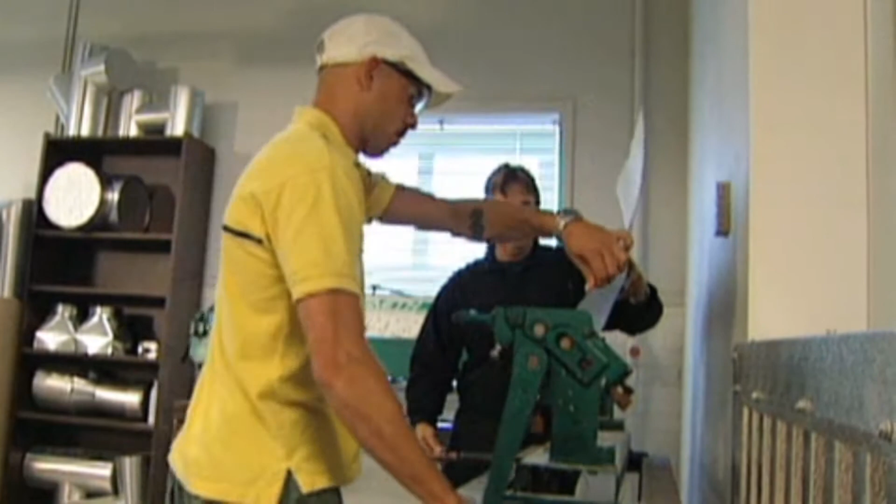Look, we know your time is valuable, but a tour through the video features provided on this site are going to demonstrate a few simple truths to you. Number one, if you don't spend a great deal of time discussing what proper insulation can mean to your refining or manufacturing facility, you're not alone.

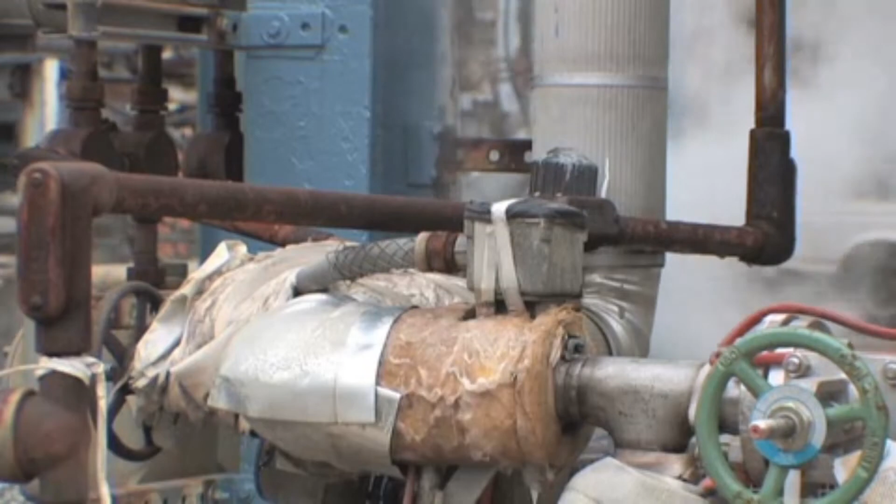When companies plan their annual budgets, they almost always allocate dollars to core assets. Since your facility is likely already up and running, insulation and energy management are really considered non-core assets. However, poor or no insulation at all is costing you thousands and thousands and thousands of dollars each and every day. These are dollars you can never get back.

We're going to show you why it makes operational, financial, and environmental sense to at least address the possibility of better energy efficiency and management through insulation.

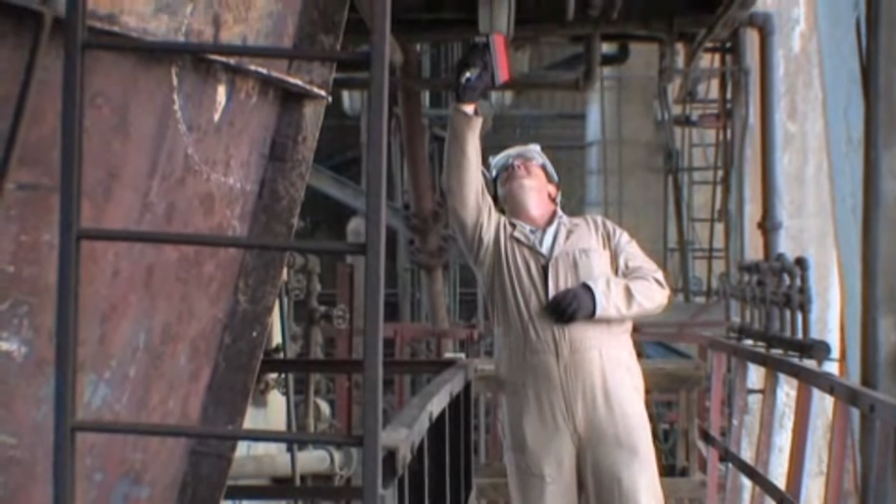Number two, we're going to tell you about a Department of Energy approved evaluation audit and computer program that can tell you how many energy dollars are evaporating into thin air, the type and amount of insulation needed to correct the problem, and how quickly the project will pay for itself.

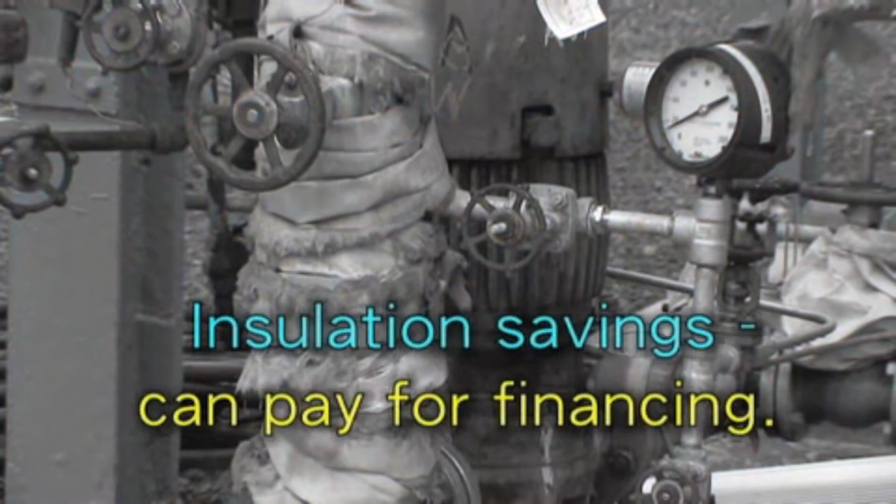Number three, we're going to give you some ideas on how you can begin to fix your insulation problem without even dipping into operating capital if you don't want to.

Number four, we're going to tell you about some forward-thinking companies that are well down the road towards improved energy efficiency and are saving big bucks as a result.

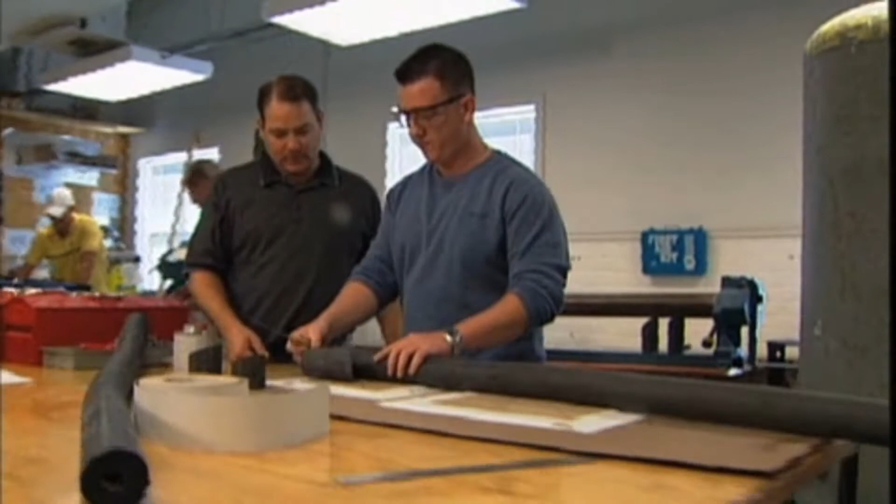And number five, we'll tell you how an insulation project designed and installed by craftsmen and women who are the products of years of formal industry training will maximize every dollar you spend.

Insulation may not be the talk of Wall Street, but investing in it pays you back many times over. When you do it, tell the world. It'll go over great with environmentalists and the green movement. In fact, why not tell your stockholders too? Anything you can do to improve the bottom line with documentable savings and appeal to the green movement sweeping the country just might be sexier news than you think.

In virtually any manufacturing and production situation, heat is the catalyst that turns raw materials into finished products. And since large plants require large amounts of energy to operate, conventional wisdom would tell you that a high priority is placed on insulation to harness as much of that heat as possible.

Wrong. In fact, recent research by an industry leader concluded that 63% of energy projects with a payback of less than 3 years are never initiated. Perhaps that's because historically, when the cost of energy was inexpensive, no one really cared how much energy was lost in the manufacturing or refining process. And when you throw in an 'if it ain't broke, don't fix it' mentality, you can see why things like improving insulation are not high on the budget list.

But when you consider that the utility cost of a plant these days can run 50% or more of its entire operating expense, maybe you should give insulation another, more serious look.

We recently took a walk around an industrial facility to look for random examples of heat loss, losses that drain dollars from company coffers, like a silent bandit. Chris Kahn has the report.

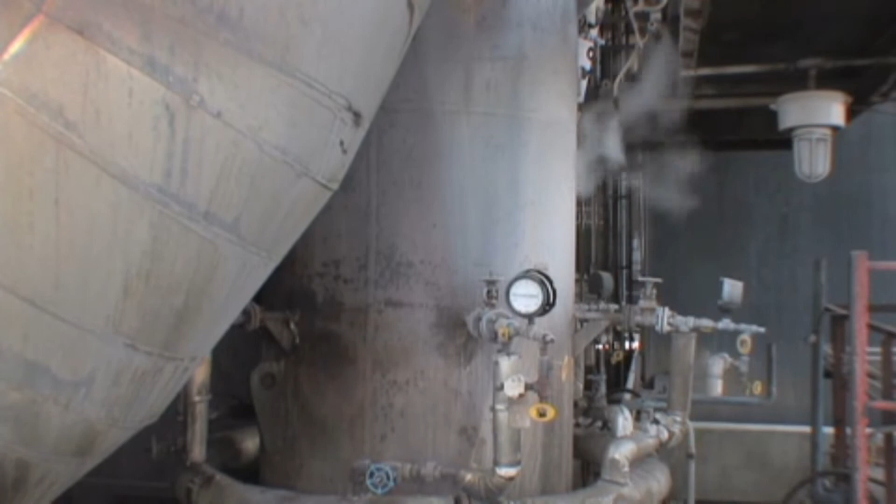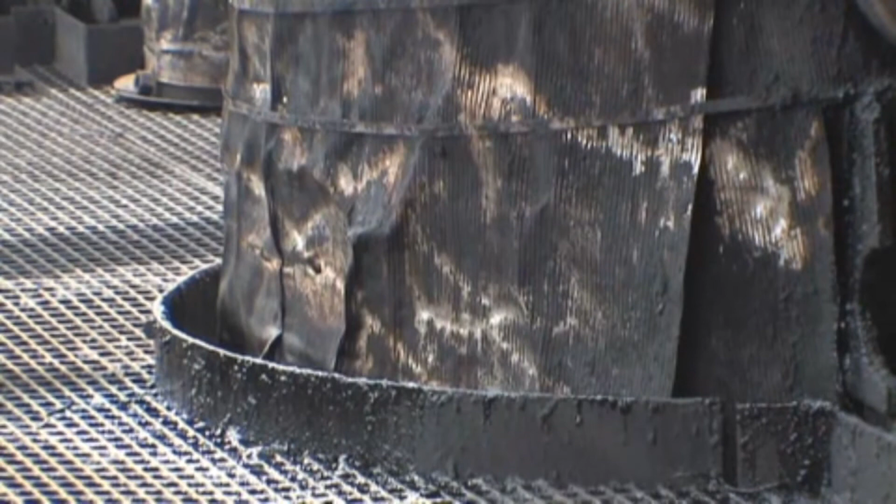This is Keith Wagner, a representative of the iSave team. In his hand is a heat gun. He points the gun, pulls the trigger, and a laser shoots where he's aiming. The gun gives him a reading of how hot this target is. The hotter the target, the more heat, the more money that is escaping into the air. Today, Keith's target is any pipe, drum, or valve inside this refinery. He's comparing or illustrating heat loss by taking readings between pipes with good insulation, poor insulation, or no insulation.

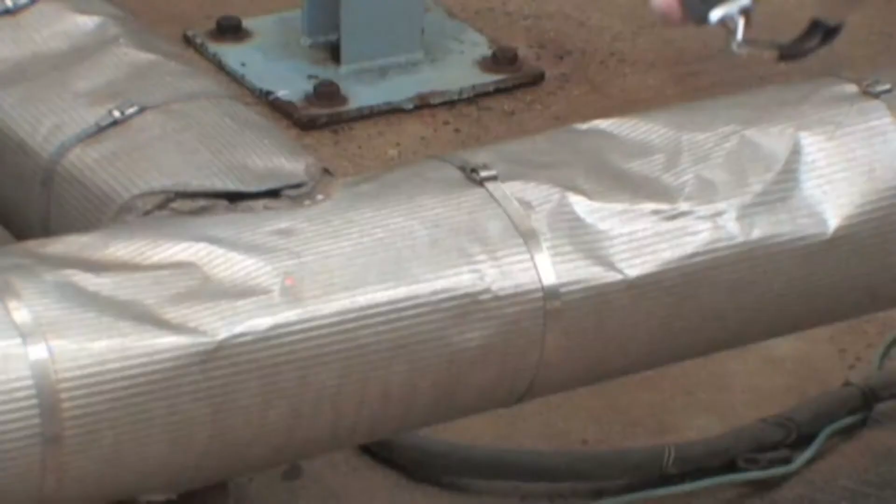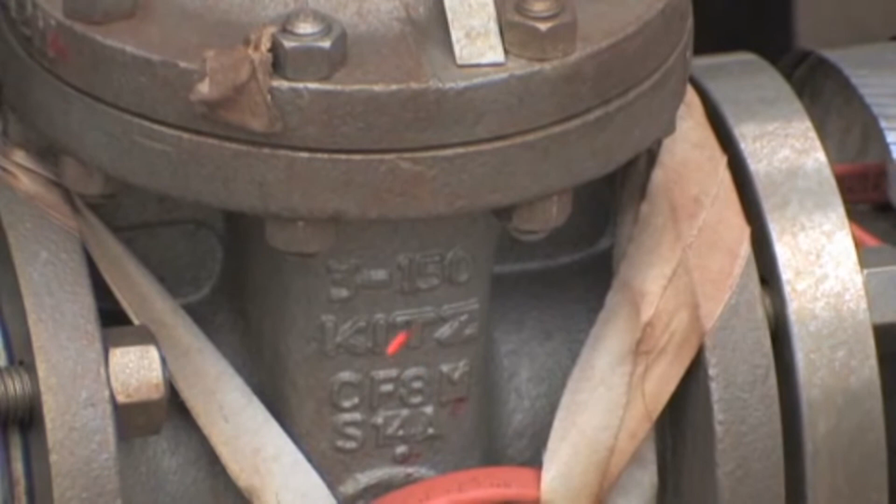When we do the shooting of the poorly insulated piping, even though the piping is insulated, it needs some work. It registers approximately 50 degrees Fahrenheit on the scale. When I move the gun over to the uninsulated valve, it immediately jumps up to 150 degrees, showing a dramatic heat loss. This is something you actually see, you visualize, and with today's rising fuel costs, it's felt in everybody's pocketbook.

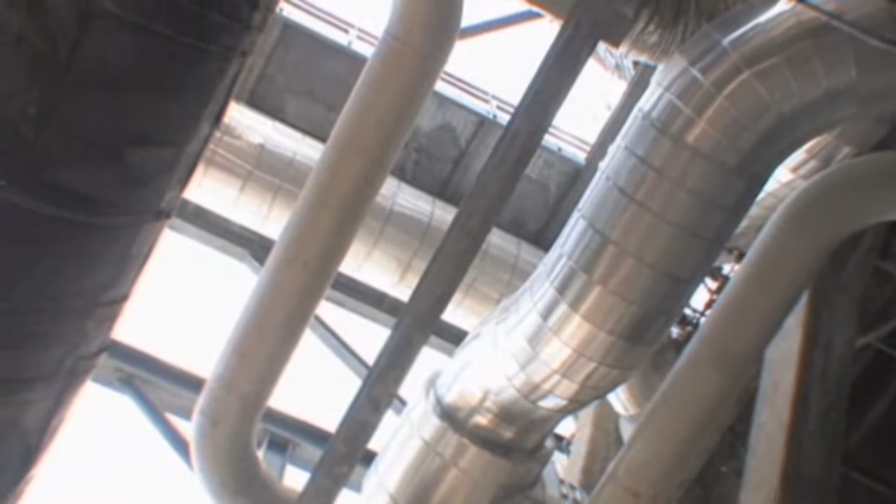The hottest part of that pipe was only 150 degrees. In truth, not that bad, but we're just getting started. The more we got into the plant, the more extreme the temperature variations were.

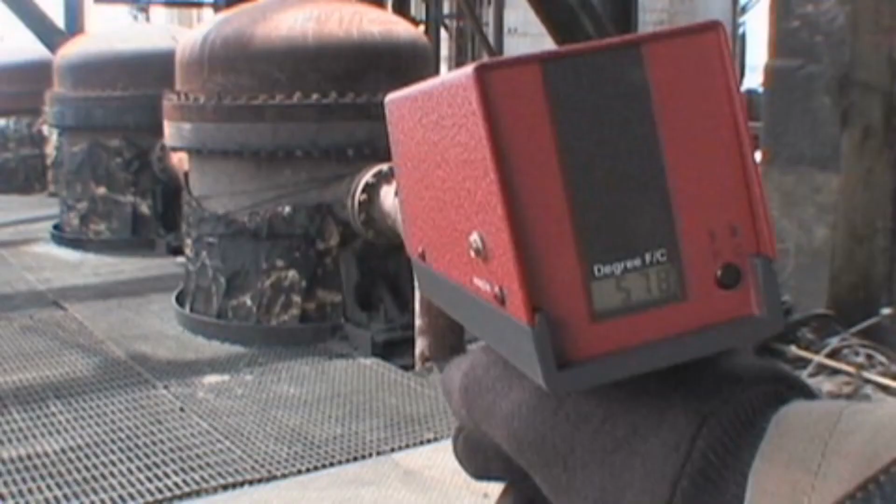Widespread heat loss situations like this prompted consultant engineer Mr. Gordon Hart to do a study that was published in Insulation Outlook magazine. The results would make any CEO or CFO fall right out of their chair.

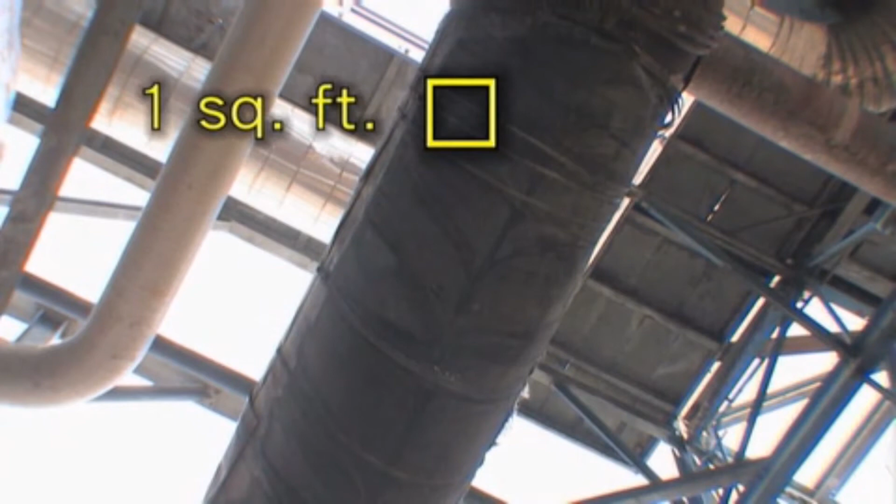Using an educated set of calculations, Hart was able to show that even 1 square foot of 600-degree pipe covered with 4-inch thick insulation would save 16 barrels of oil every 5 years. Using a baseline number like $100 a barrel, that's $1,600 simply gone with only 1 square foot of exposed pipe.

Now, how many square feet of poor or no insulation does the average small plant have? The number is actually in the hundreds of thousands. Now, how many plants are online with one company at any given time? That number is usually through the roof. But whatever your number is, you're definitely not alone.

Because Hart didn't stop there, using his educated set of criteria and calculations, Hart estimated that in 2004 alone, U.S. oil refineries collectively lost an estimated 585,000 barrels per day due to excess energy loss through damaged or missing mechanical insulation. Using Hart's heat loss numbers from 2004 with a rough estimate of today's oil prices, the number is more than $58 million in heat loss.

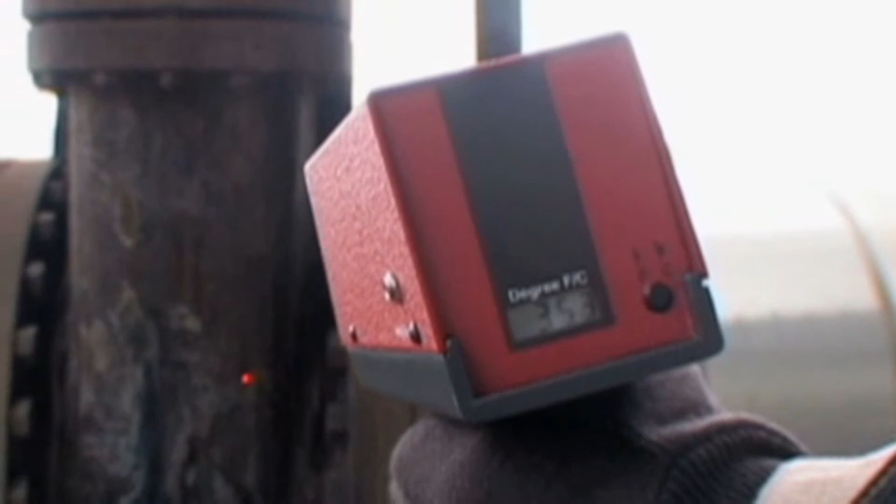So, if you're ever in a position to be near a heat gun that is showing you a pipe that's 350 degrees next to an insulated pipe that's 80, don't think of it as numbers in Fahrenheit. Think of it as your money that is silently slipping out of your reach.

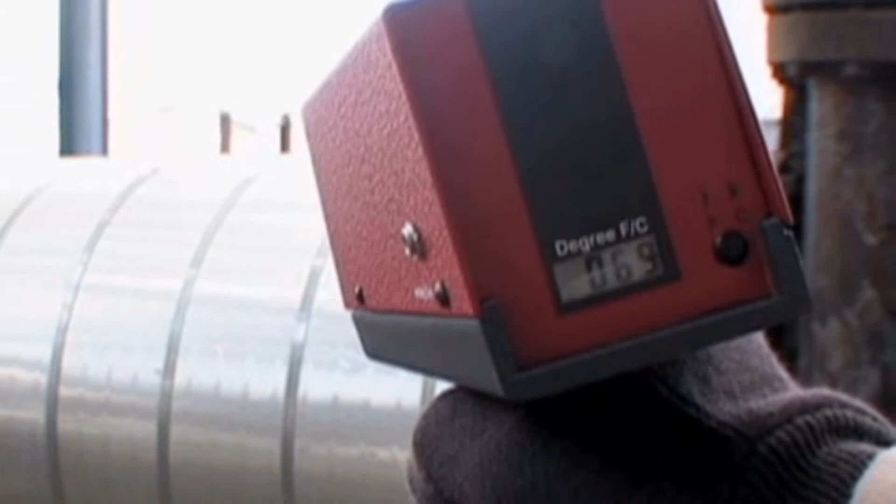If you'd like the details on Hart's study, make sure you pick up a copy of the May 2005 edition of Insulation Outlook magazine. Hoping you don't shoot the messenger, I'm Chris Kahn.

Thanks, Chris. Everyone knows it's not practical to take on a sweeping insulation project, one that covers every pipe and valve at every company's facilities all at once. But many large manufacturers that have begun the process are seeing immediate results, and they're ramping up their insulation upgrades.

One of the tools they're using is the Department of Energy endorsed 3E Plus program. It's a way to take a look at an industrial facility and break out an energy saving plan into real numbers. It lets you see what the insulation costs are and what the savings would be. More on 3E Plus is just a click away.

The North American Insulation Manufacturers Association has developed a software program designed to help you easily determine how much insulation is necessary to use less energy, reduce plant emissions, and improve process efficiency at your plant or facility. There's very little time in a manufacturing facility manager's day to look at the efficiency of the energy delivery system. Conversely, a lot of a facility's costs are directly influenced by the amount of energy used and, more importantly, lost.

The 3E Plus program attacks your energy issues head-on when a certified insulation appraiser spends a couple of days in your plant and develops options on how to improve your energy efficiency. They can give you actual numbers and show you actual dollar savings.

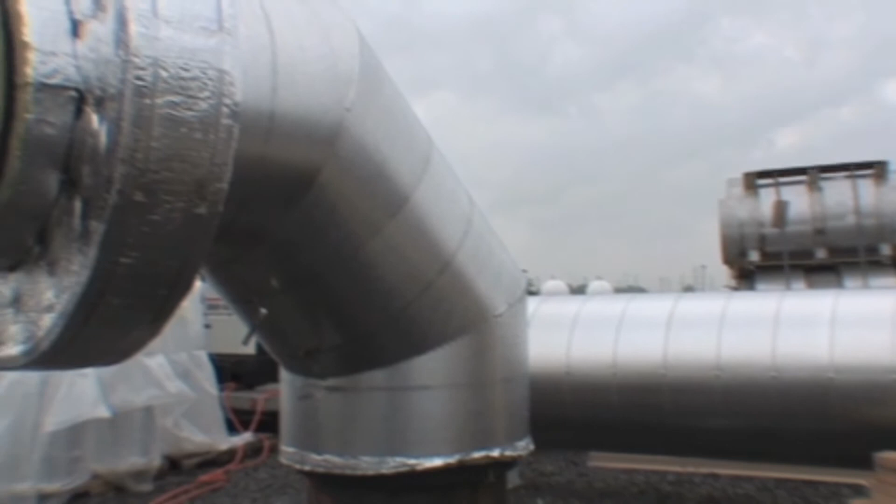The software allows the appraiser to run a handful of different scenarios depending on your plant's energy priorities.

I'm here today to talk about NAIMA's 3E Plus program. 3E Plus is a computer program that will allow you to calculate heat loss and heat gain in a piping or insulation system. It's a simple program.

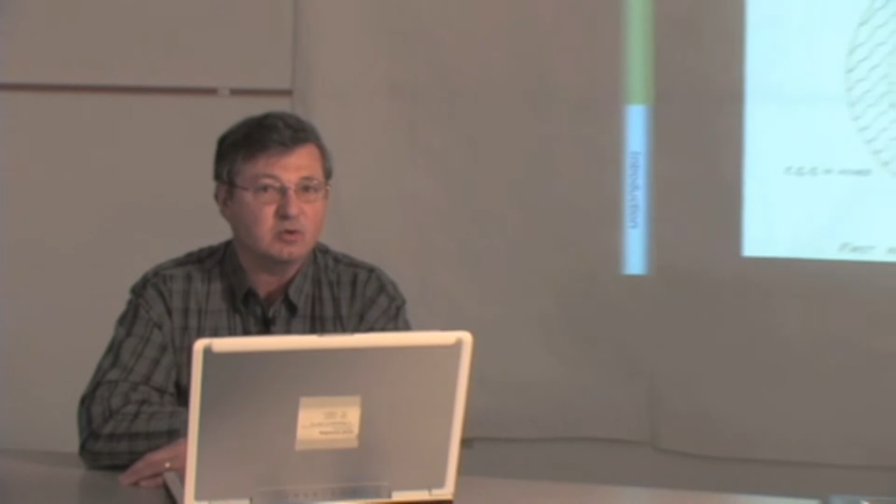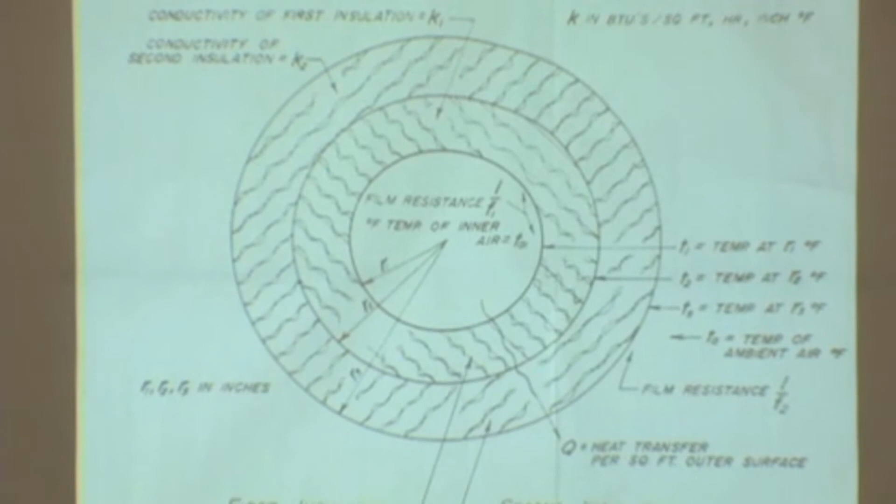It does a steady state, one-dimensional heat loss calculation of a piping or equipment system. For example, we're showing here a pipe which has two layers of insulation on it. It's got an inside temperature with fluids inside, and an outside ambient condition.

3E Plus goes through the calculation of BTU heat loss in this system. Let's assume we're talking about a steam system in a plant, and we're interested in calculating the heat loss per hour. We're going to look at a pipe that might be horizontal. The program allows you to look at horizontal and vertical piping, horizontal and vertical tubing, and a number of different systems.

Let's stick with horizontal pipe for a second. Assuming the process temperature is 350 F, the ambient might be 75. Let's pick a pipe size of 12 inches, and let's assume the wind speed is maybe 3 miles an hour for the particular case we want to look at.

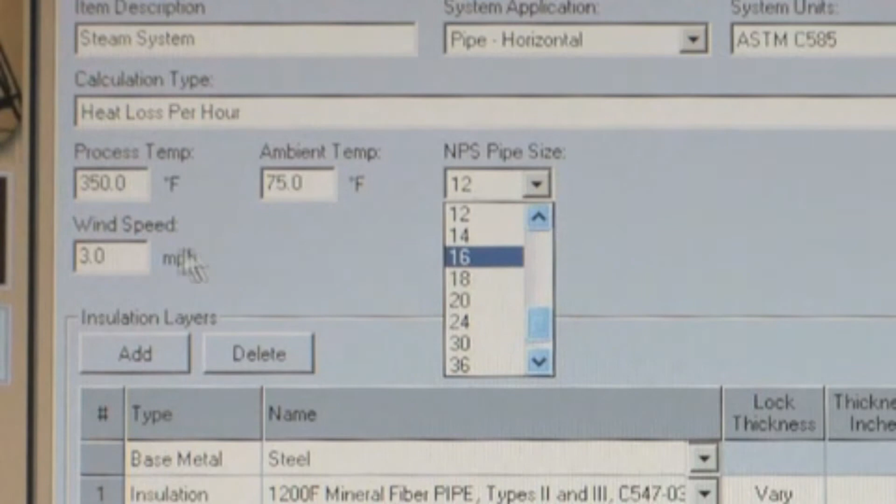The program allows us to select the material system we're interested in. The base metal here is steel, but we could choose stainless steel, copper, PVC, or other materials. The insulation in this case, let's assume 1200 F mineral fiber, and let's assume a jacketing of aluminum with an emittance of 0.1.

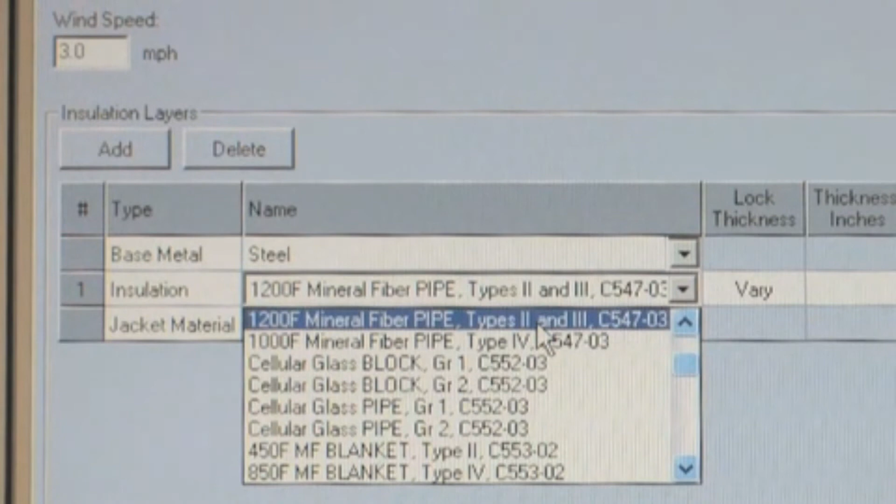Simply hit the calculate button and the program will calculate the heat loss and surface temperature for a bare situation with no insulation, and a number of different thicknesses going from 1/2 inch to 10 inch.

In this case, you can see that for a bare pipe, uninsulated, the surface temperature would be about 349 degrees, not 350 degrees like the fluid inside. The heat loss would be 2939 BTUs per hour per linear foot.

Adding only a 1/2 inch of insulation to that brings that surface temperature down to 150, and reduces the heat loss to 409 per this calculation, which is about 86% less than the bare case.

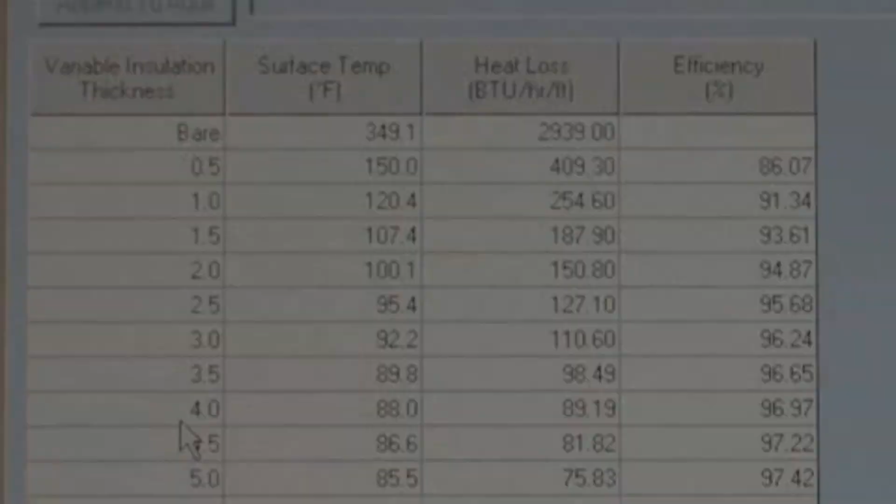Just think of how many pipes, drums, valves, or boilers you have in your facility that are like this. Think of how much money, at more than $100 a barrel, is vanishing into thin air in the form of heat loss. With a little homework and investment of time, you can get an energy audit of your facility, and more importantly, you'll be able to tell in raw, actual numbers just how much money you'll save and how quickly you'll save it.

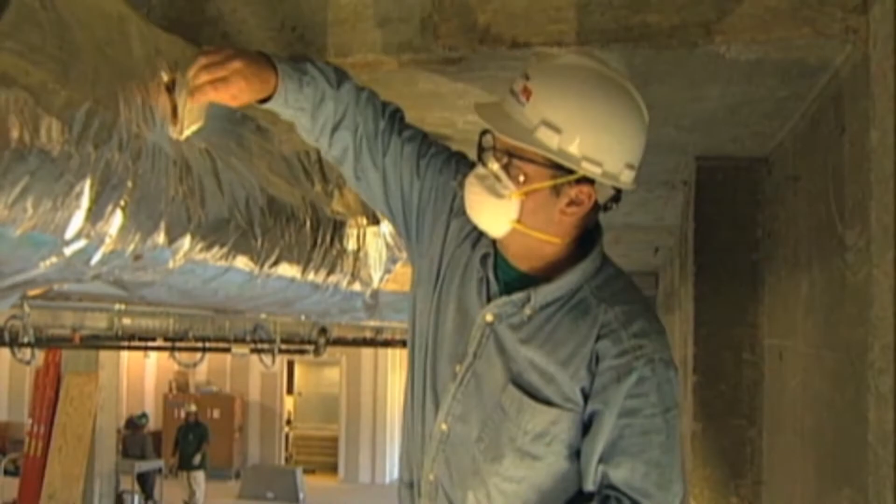With the money at your disposal, you can take on an aggressive, sweeping energy saving plan right away. You can do more, quicker, and fix the cost of your improvement campaign to plan accordingly. With improved insulation, your machinery will perform better and take less toll on the people working around it. You'll begin saving on energy costs right away, and here's the biggie: your energy savings will soon pay for the cost of the insulation upgrade. You'll pay off the note quickly, then benefit from reduced energy costs for years. It's good for your plant, it's good for your workers, it's good for the environment, and it's good for the bottom line.

Thanks, Brian. Cost savings without a big hit in capital expenditures. Upgrading or installing insulation in your facility really can be the best of both worlds. If you've spent any time on this site, you know by now that installing or improving insulation at your facility will save you big money in energy costs. Now it's time to talk about actual case studies, and joining me with the numbers is Brian Joyce.

Thanks a lot, Tom. The insulation industry is one where a person can really do the math and point to actual cost savings as a result of work being done. I have a few examples we can run through, with numbers courtesy of the National Insulation Association and the Department of Energy. Some of these numbers are real eye-openers when you take a look at them, Tom. Well, let's take a look at them.

Let's start with the paper mill down in Jackson, Alabama with Boise Cascade. Just by replacing pipe insulation, they spent $25,000 - that's all they spent. Their savings: $80,000, and that's a payback in less than 4 months, Tom. It's paying for itself in 4 months.

Let's go to Kingsport, Tennessee and check in on Eastman Chemical. They took a best practice approach to insulation, going through their plant and making necessary changes to maximize the impact of their insulation. Get this: $1 million in identified savings with re-insulation cost of only $300,000. That's a rate of return in 4 months.

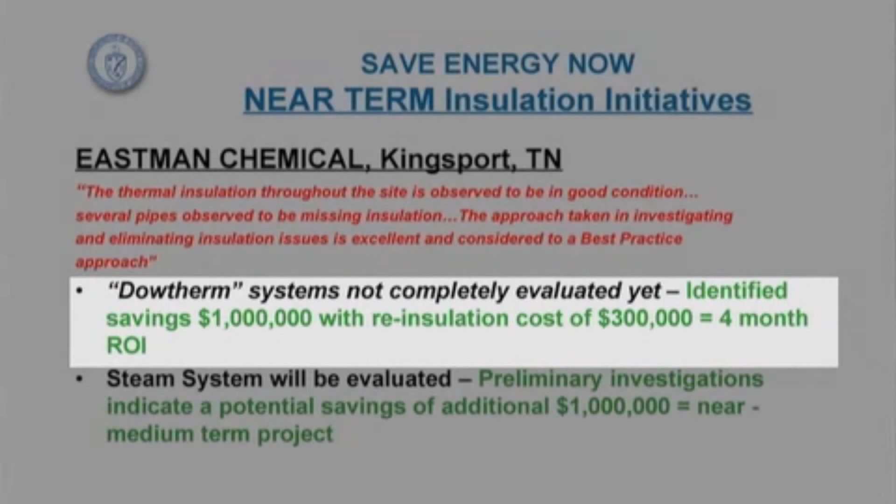We go up to Pontiac, Michigan now to see what's up with the GM power plant. They did the same thing - replaced some missing insulation and other repairs. They saved roughly $298,000 a year.

Indianapolis, Indiana. Coming up next, we're checking in on National Starch. They did repair and replace some insulation. Their savings, another good figure: $125,000 a year.

These are all amazing. How about the chemical plant in Texas City, Texas, belonging to Sterling Chemical? They already had some insulation - all they did was improve the insulation they had. Their estimated savings: $123,000 a year. It is amazing, it really is.

This Dow plant right here in Louisiana, look at this. Just by replacing, repairing, and improving insulation on a steam system - this is not a joke - the potential savings: $811,000 a year, almost $1 million, Tom.

Another one well into six figures, the MeadWestvaco plant down in Silsbee, Texas. They commissioned an insulation strike team to go through their plant and repair poor, damaged, and missing insulation. By reducing heat loss by just 10%, almost $500,000 a year - $486,000 just by 10%.

Big companies, big savings. Let's check in with U.S. Steel, Gary, Indiana. By proper sizing, type and thickness of insulation, and improving maintenance of insulation systems, their potential savings will be in excess of $1.5 million - I'm talking $1.5 million a year. That is a lot of money.

Let's check in with Bayer now, huge savings in Institute, West Virginia. All they had to do was improve and replace some missing insulation. Their potential savings, here we go again, almost $1 million - $926,000 a year.